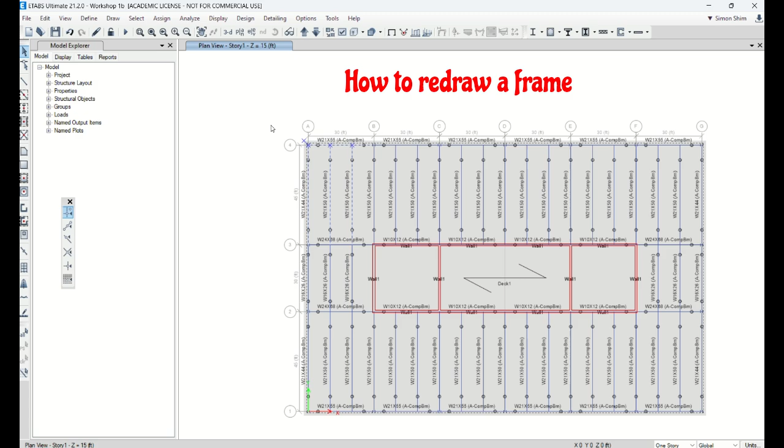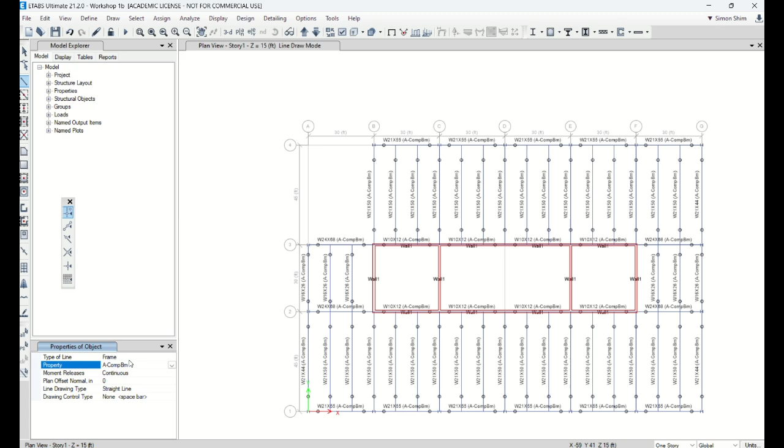Okay, C495. Today I'll just try to show you how to use ETABS for framing and adjustment. Because the geometry of the building is usually complex, you may have to draw framing in many cases. So here I'm gonna show you, using the previous model, the other framing layout. I'm gonna use a composite beam again and simple pin connections.

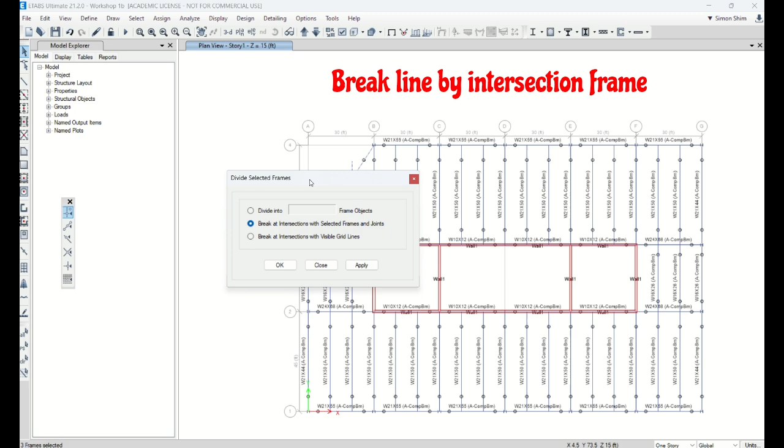I'm gonna draw the beam like this, and I need to draw the beam perpendicular, right? Since I have the beam, ETABS has some snap tools. See that line? The green line means I'm perpendicular to the beam. So I draw the beams, select all the members, edit and divide. I'm gonna break the line at the intersection. So I just draw the framing like this.

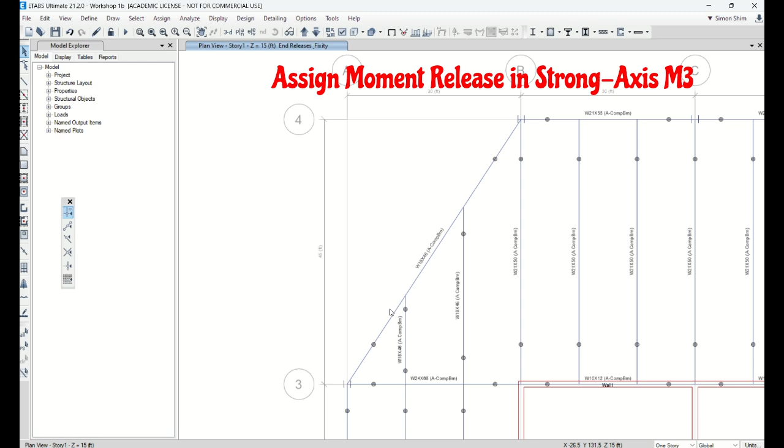But I don't want these members segmented, so I'm gonna go to edit frame, join frame, and I select this beam and assign a moment release about the strong axis. So this is how you can adjust the beam. This is one member, internally connected, right? See, all the beams have the same moment release. Okay, so you could use all the ETABS tools.

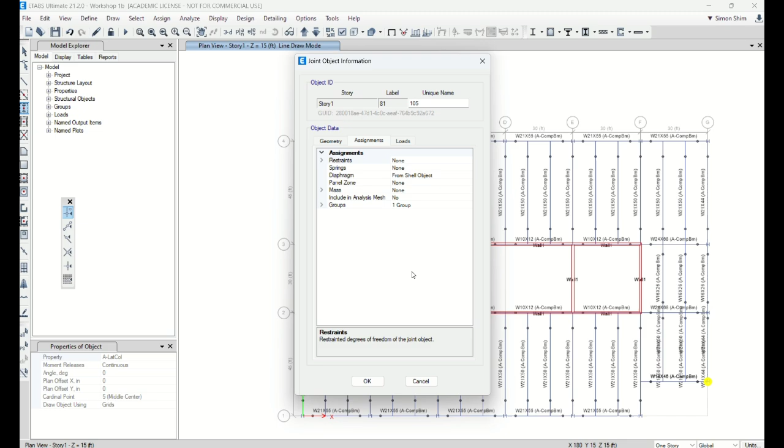Here, maybe I could do something slightly different. Here I divide into maybe 3 pieces, right? Instead of the column at the corner, hold on, I'm gonna draw the beam like this and drop the column right there. With that, I'm gonna select this beam and reassign the moment release. Since I segmented, those beams are also broken into pieces, so I'm gonna join this beam as one member, right? Basically the column was at the corner, but now I move this corner column to there and reframe it.

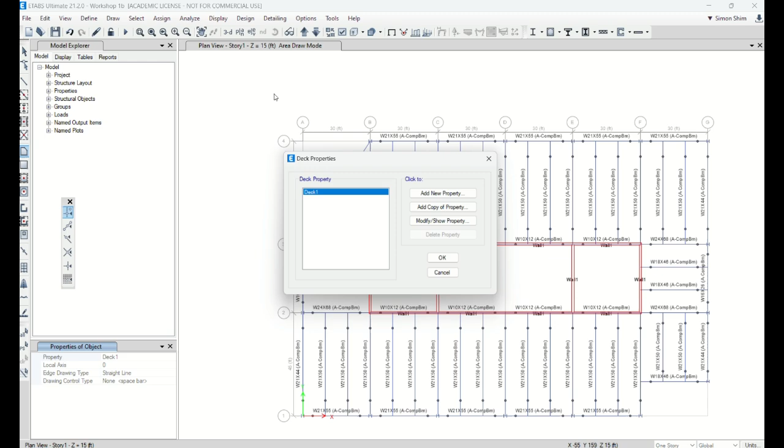Another thing I want to show you: what if we rotate this beam 90 degrees, right? Instead of parallel, just rotate 90 degrees like this. In this case, you need to think about the metal deck slab. Instead of using just one big metal deck slab, I'm gonna choose the metal deck slab. Wait a minute, what's the property I'm using? Deck here. Okay, 3-inch metal deck plus 4.5-inch normal weight concrete, right?

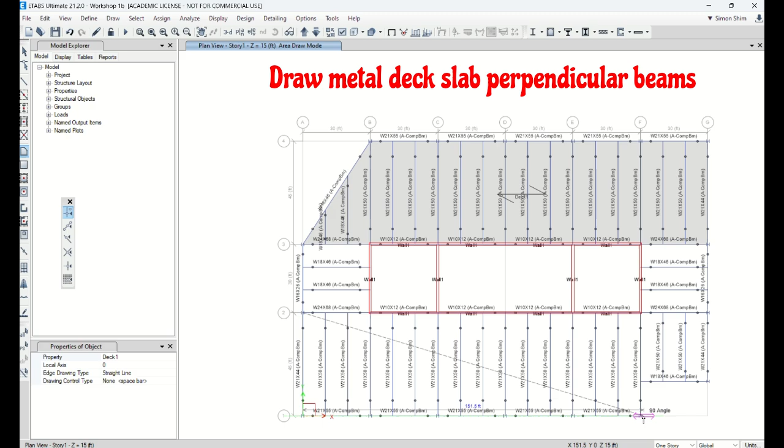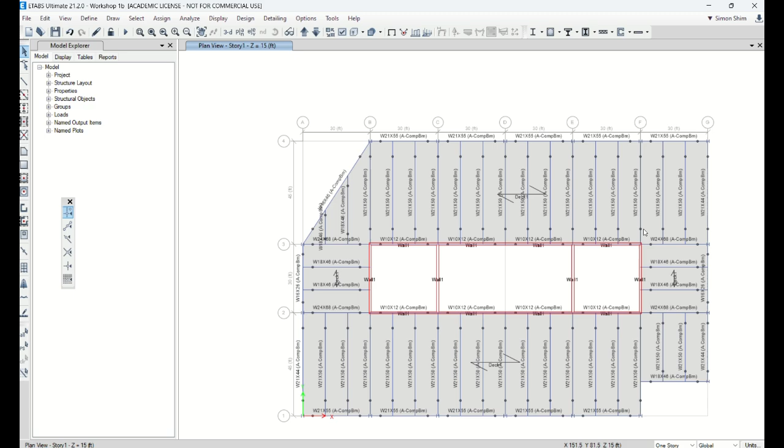Since we have a different orientation, you need to use this irregular option and then click, click, click and click. See, that metal deck should be perpendicular. And this too. Like that. So this is 90 degrees, right? And then the other two, because the metal deck should be rotated 90 degrees, I'm gonna use the rectangular quick draw option. So I draw the metal deck, but instead of just one big metal slab, I break it into 4 pieces.

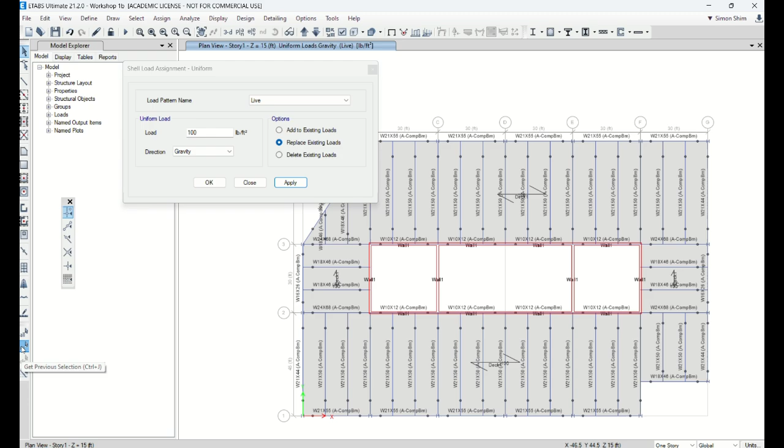So now let's assign the loading, right? Go to uniform shell loading, uniform load. Self-weight is still there. The live load, we assign 100 PSF, previous select, SDL, we assign 20 PSF, previous select, construction live load 20 PSF. Alright, so I assigned all the loads here. You see that the load was assigned.

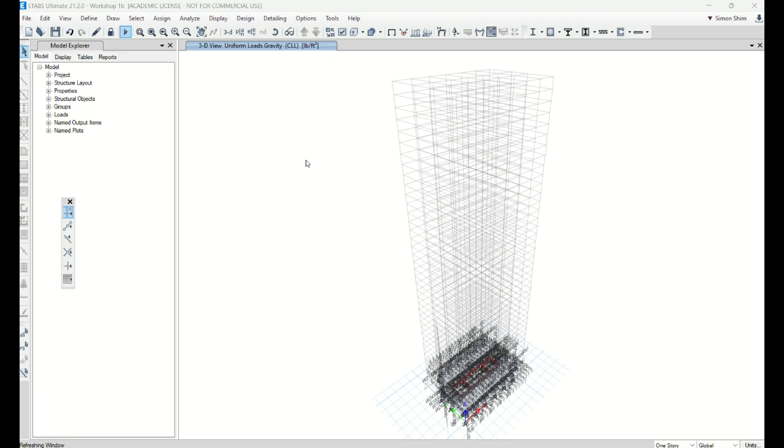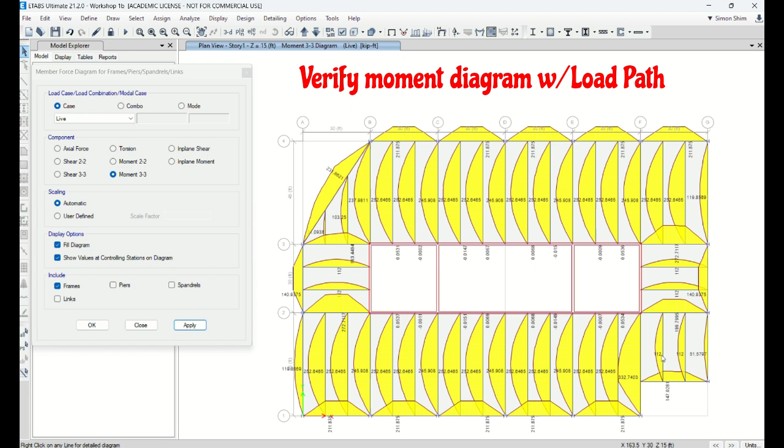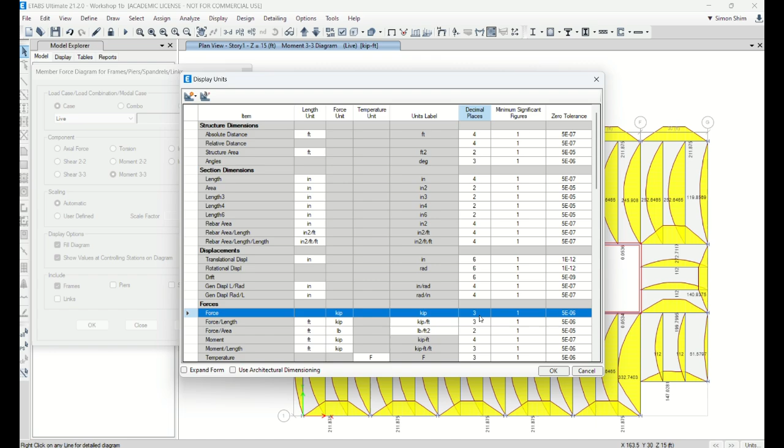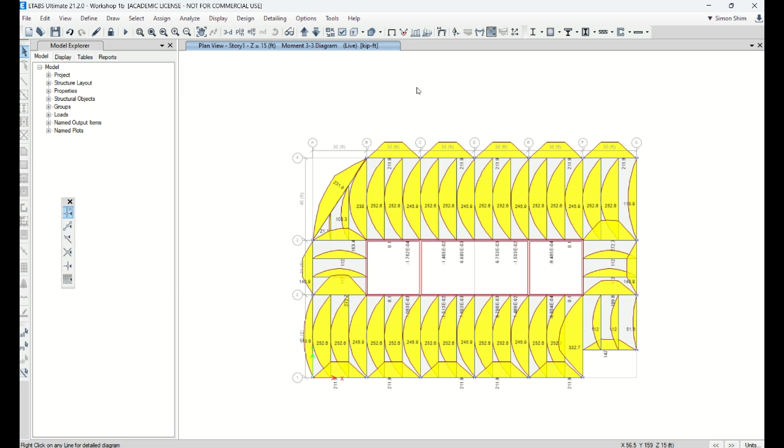See that, especially here, any uniform load on the slab goes to this filler beam, and this filler beam reaction goes to the girder first and second. So the girder is really supporting this relatively big area, so the moment is relatively high. Let's change this decimal point. Okay, so you see how to adjust the framing, right? I think you have to get used to this. Obviously, your building geometry is more complex, so often you need to manually adjust it.

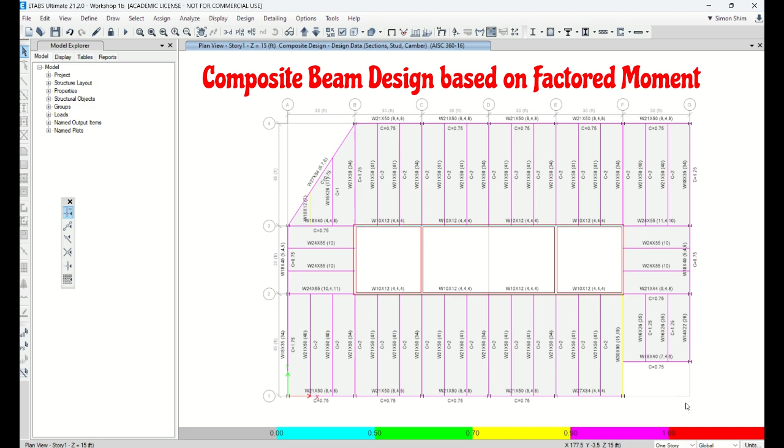All right, so now we're gonna run the composite beam design. When you see this, because of the geometry changes, the girder is quite a bit longer, so it requires W27 instead of just W21, right? And here you can see that because of the big bending moment, ETABS chooses a heavy section, W30x90, based upon the factored load and deflections.

So this is just another example that I want you to practice a little bit. This is all about geometry. First of all, you need to get used to how to manipulate the ETABS tool, so that you should be able to redraw the framing based upon your interest.